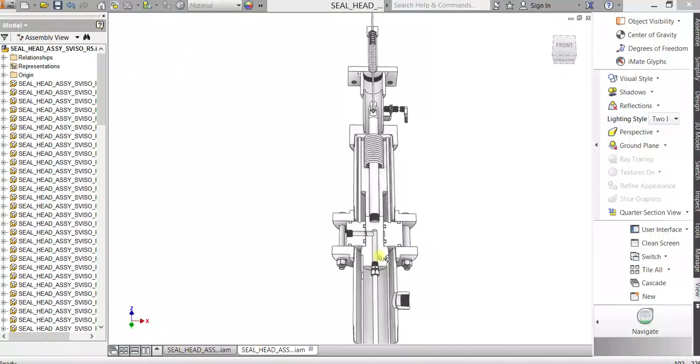Morning. Thought I'd go ahead and do a quick video on the docking seal station assembly, and I can show a quick animation of how the components will work when they're in operation.

So this is pretty basic. This is the seal housing right here. Outside of it, we've got 4.5-inch pipe, a 4-inch NPT threaded nipple, and 4-inch NPT threaded flanges there and there.

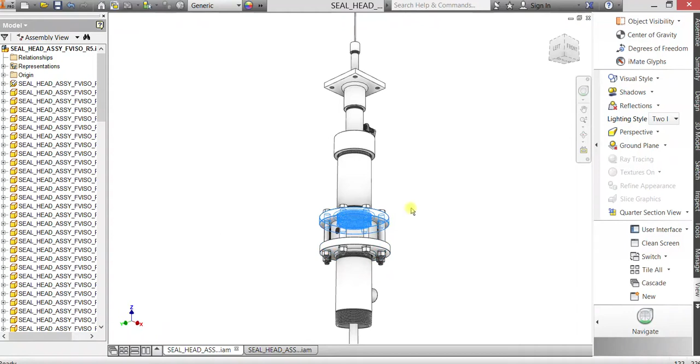In between the two flanges, we have our gland seal housing, and that has a 1/2-inch NPT outlet for the fluid on the side. That's made out of high impact PVC plastic.

Then right here we have another 4-inch NPT nipple, and a high pressure 4-inch NPT cap.

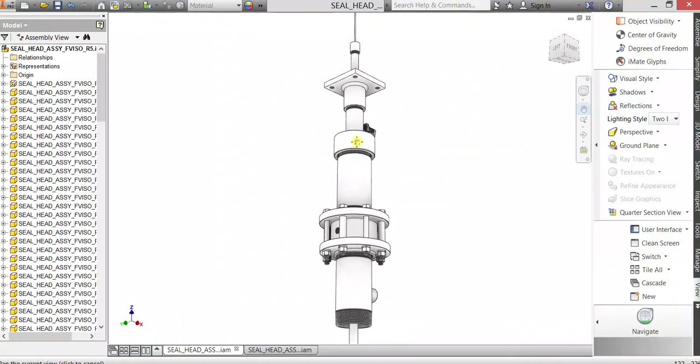As we move towards the top here, on the right is a capacitive, normally closed, NPN sensor that will sense the docking guide rod. When it reaches the surface, it'll enter into this part of the nipple, and that capacitive sensor will pick it up and stop the unit and start the fluid discharge cycle on the controller.

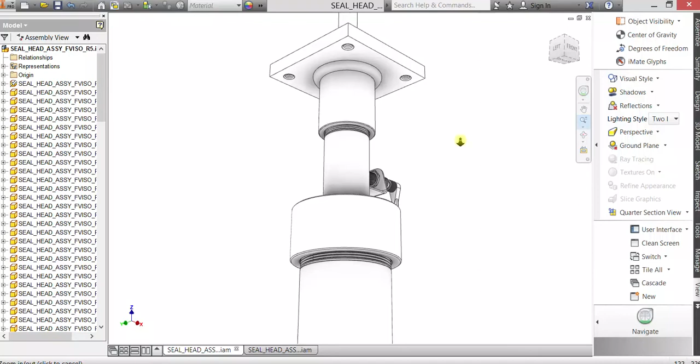This is a heavy, high pressure threaded coupling. I used a heavy coupling because we're going to weld it to the bottom of that 3/4-inch adapter plate. Incidentally, that adapter plate is where the baler will bolt on to the 4.5-inch center hole pattern, and that should be tapped with 5/8-11 taps.

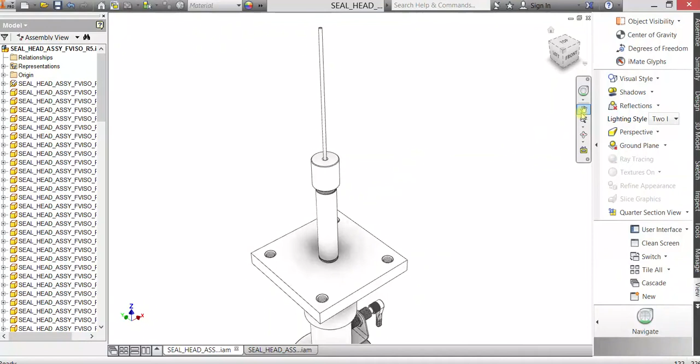Here we have our 3/4-inch seal housing, which will house the dynamic high-speed packing gland seals, and a cap, and there's a spring in there that I'll show in another view.

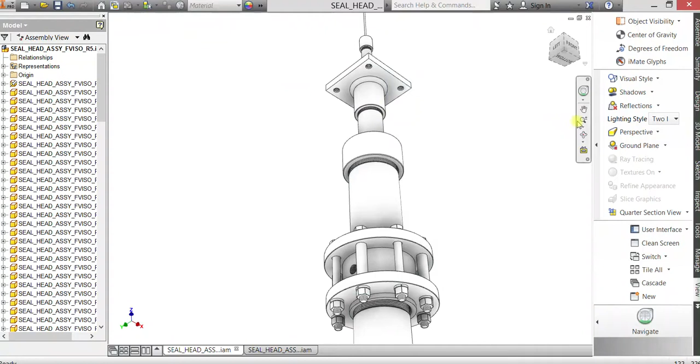This would represent the nylon coated cable, coming through the top of that location there. And of course below that we have our canister.

There is the canister right there. And of course your fluid canister, the new seal nose, that'll also be made out of high impact plastic, PVC.

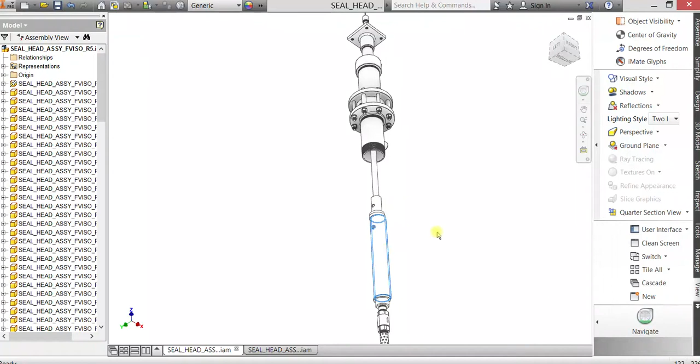Then we have our Schedule 40 PVC canister pipe. That's the vent. We have our check valve adapter, and of course the strainer on the bottom.

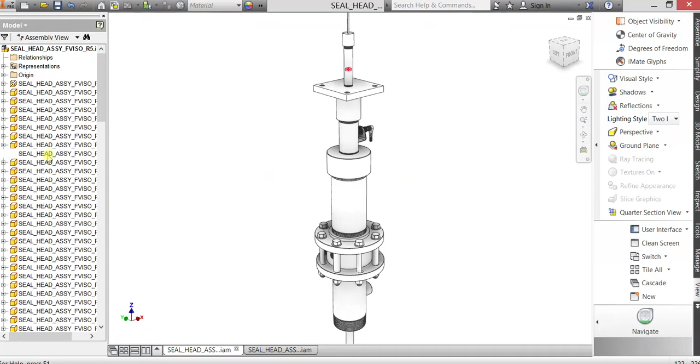Okay, so that's the basics of it. Now we'll go to the half section view here and look at the components on the inside. I'll do a quick animation here so you can see it in action.

In fact, I'm going to do the animation first, it'll explain itself. So right now the canister is uphole and docked, ready to discharge or evacuate the fluid. And the guide rod has reached the inside of the 2-inch steel nipple there, in front of the capacitive sensor.

So what I'm going to do right now is a quick animation, just driving the constraints themselves. I haven't had time to do a full animation yet, so I'm doing this on the fly so you can see what I've got drawn up here, as I'm still in the process of labeling and dimensioning everything out.

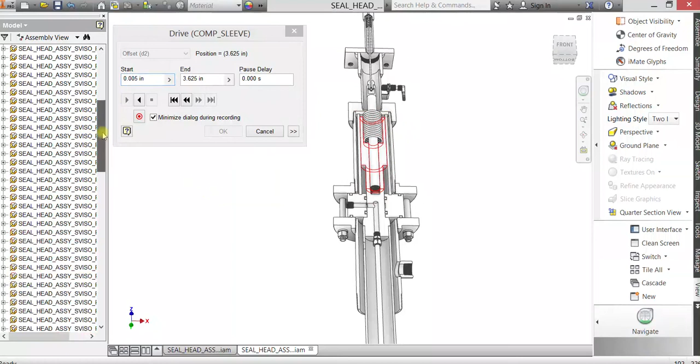And I actually need to get over to Odessa and do some work there this morning.

So we accelerate slowly, and the compression spring is pushing the canister and the rod seal nose out of the gland seal housing, and it's replacing itself into the gland seal housing. So now the rod compression sleeve has the fluid outlet sealed here, maintaining the composure and shape of the seals.

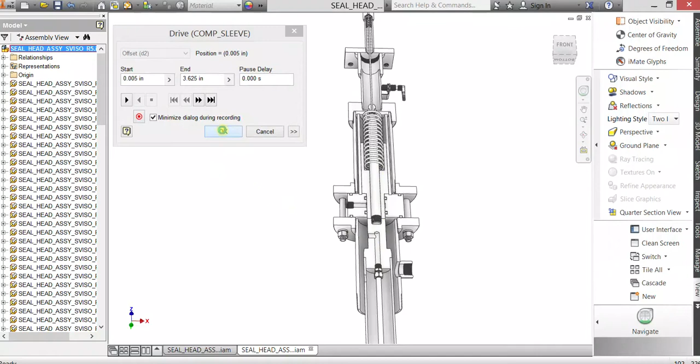And now we are able to slip out of this looser fit, out of the guide sleeve, and head on down the well bore. I'll show that right now by animating this next constraint. So we'll drive this next one, and now we're heading back down the well bore.

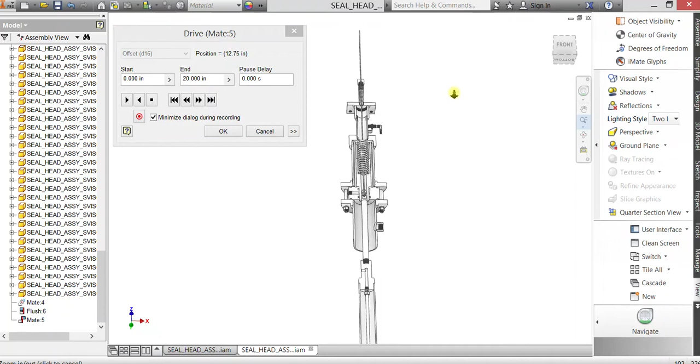I'm going to bring it back up and let you see the whole process again. It's pretty straightforward, I think it'll work a lot better. The spring is centered, it's an 8-inch compression spring, has a 100-pound full compressed load capacity.

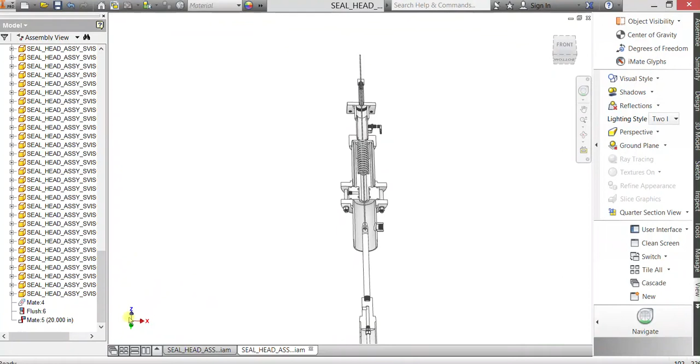I think that should work quite well for us. So what we'll do is I'm going to zoom in a little closer here, and we're going to bring the canister and the guide rod back up the hole and seat it into the seal docking station.

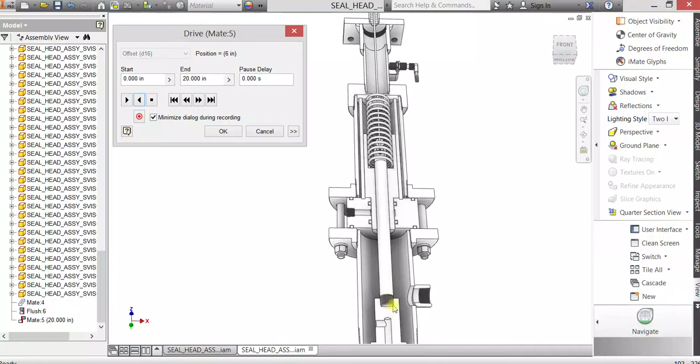So the first process happens here. The stainless steel 3/4-inch solid rod that's threaded into the seal nose is guided into the guide sleeve, compression guide sleeve, and now it's reached, and it's also guided up here towards the top. So now we're straight, and we reach the bottom of the compression sleeve here, and this is all going to happen in a few seconds when it's coming up.

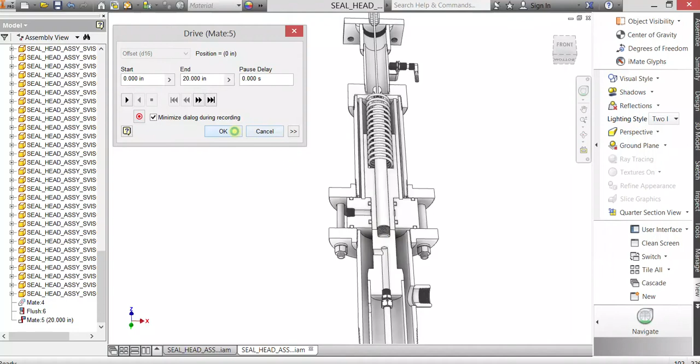Once it reaches this point, I'll drive the next constraint. Now it compresses, so the speed of the uphole return is being slowed and absorbed in the shock here, in the compression sleeve, and it's able to make a smooth transition into the seal gland housing here.

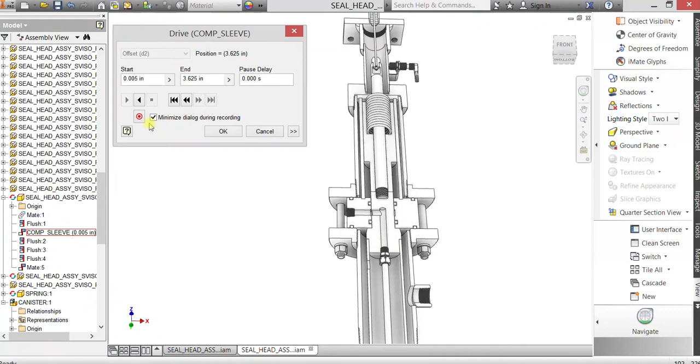So now the fluid's discharged. It's either evacuated through the suction line via the pump, or if there's enough gas pressure, then gas pressure is equalized through the vent on the canister, and the fluid can be pushed out using the gas pressure, and that's picked up on a separate sensor on the controller.

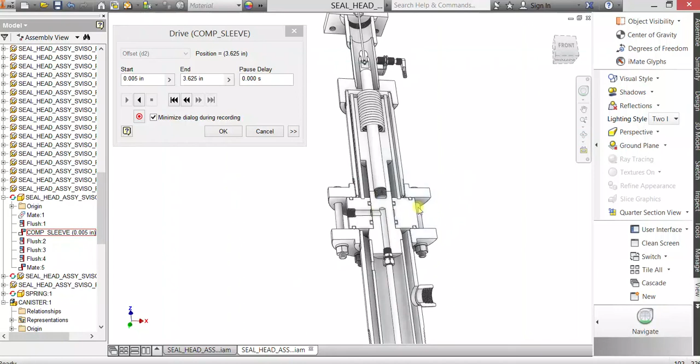So then to return back down the well bore, we go for a slow acceleration. We ramp up very slowly and allow the compression spring to push the canister out together, so these stay together as they're coming out.

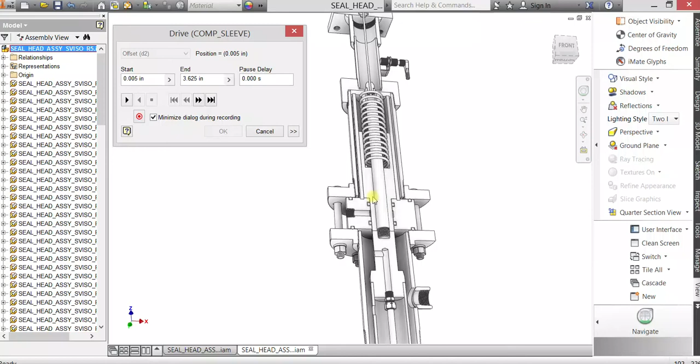And now the compression sleeve has replaced itself into the seal, maintaining the composure and shape of the O-ring seals. And now we're into a slip fit where the canister can easily slide out of that compression sleeve. And of course from that point it would just continue back down the hole again.

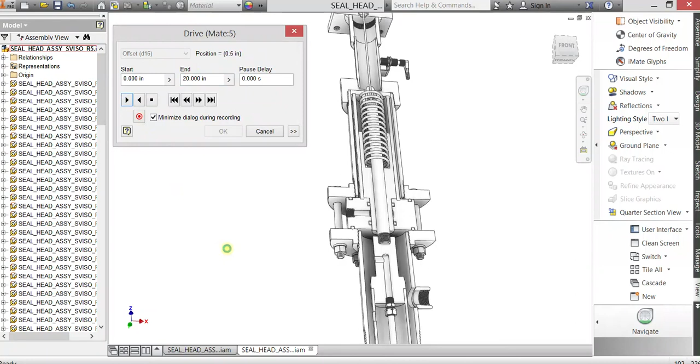Sorry this is so slow, but I'm doing it on the fly. I'll actually do an animation of the whole thing when we're happy with this.

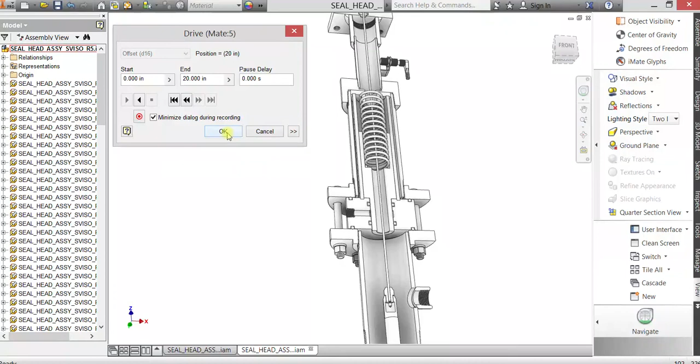So take a look at the video and let me know your thoughts, and I'll continue to dimension things out and get those to you as well. But I thought this would be a good place to start for conversation and determining that we want to proceed with this method.